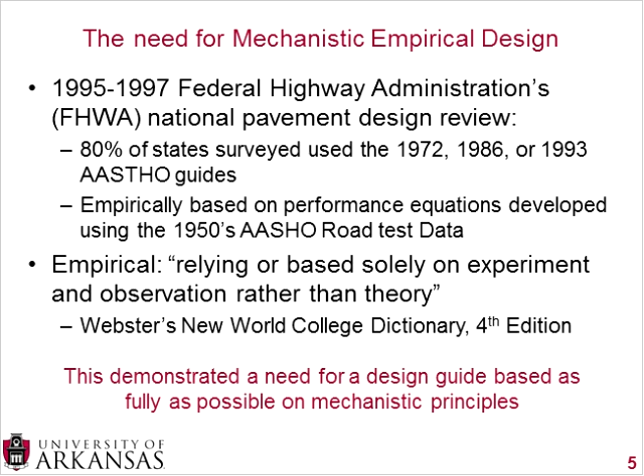We'll go into that a little more as we go on, but in general, as we develop our design strategies, we're definitely wanting to move toward the mechanistic side of designing.

So what were some of the deficiencies of the AASHTO guides, whether from 72, 86, or 93? Well, first of all, there were some climate effect issues. The test track was located in central Illinois, so there was one geographic location. Now, I did go to the University of Illinois, so I may be biased toward that part of the country. However, I do fully realize that there are many more climate types around our country than just central Illinois.

Not to mention it's awfully flat, but that wasn't taken into account. In addition to the one geographic location, they only had one type of subgrade. As you go around different parts of the country, there are obviously many different types of subgrades out there. For the project, they only used one HMA and one PCC mix. So all of these numbers in the 72, 86, and 93 design guides were based off of only a single HMA mix and a single PCC mix placed on a single subgrade in only one geographic location. So you can kind of see how this is a pretty narrow scope.

And while a lot of good data was collected, and it definitely helped advance our pavement knowledge, it really doesn't encompass what we're encountering today, where we have many, many different types of both HMA and PCC mix and mix designs.

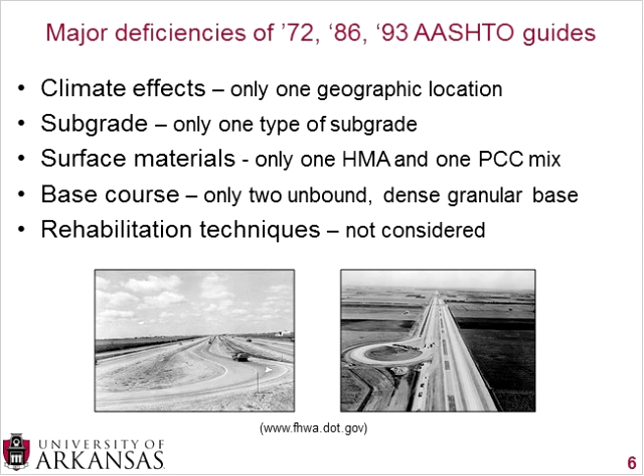For example, right now we have the new super single tires. I don't know if you've noticed while driving down the interstate, now some of the semis have single tires on each side of the axle on the back of the trailers instead of having the more typical double tires. So that's an improvement in technology in a lot of ways, but that also means you're looking at new tire pressures within those super singles, new axle configurations, and those type of things.

For the construction and the drainage, they used a relatively old technique. There's been a lot of advancements in construction technologies, and also they had no subdrainage. So right now, we fully realize that having water trapped within our pavement structure is not a good thing. So we spend a lot of time designing and planning for drainage.

The design life for the AASHTO road test in Illinois was only for 2 years. Right now we can design roads for 20, 30, up to 50 years if we so choose. So that's pretty limiting. And then finally, the performance is only related to the layer thickness, so they didn't look at any other material properties, any other quantifiable factors when thinking about performance.

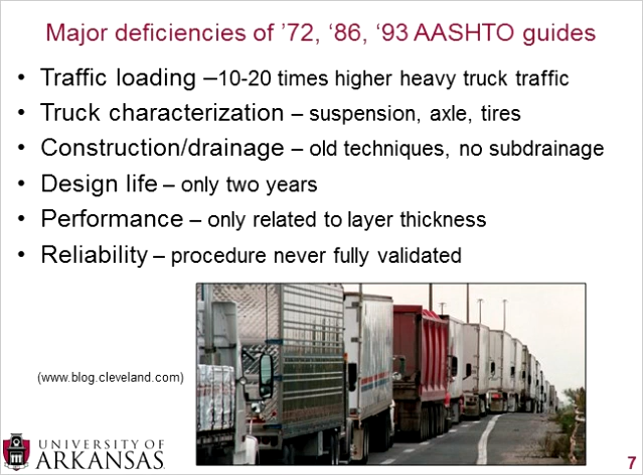And finally, they never validated the procedure. So they did a lot of work, a lot of good work, got a lot of information, but it was actually never validated with a second party. As all researchers know, you try and do things perfectly, but either mistakes or oversights do occur. So by not validating this information, that really does shortchange a lot of the potential for new changes.

So those are some of the disadvantages of the old design method.

So what are some of the advantages of the mechanistic empirical design method? At the end of the day, we want to reduce early failures in pavements and increase pavement life. Mechanistic empirical design incorporates a significant amount of material properties into the design strategy, and by using these properties you can better predict how the pavement will fail. Also, a lot of design features can be directly considered in mechanistic empirical design.

For example, you can compare the bending strain at the bottom of an HMA layer to fatigue cracking predicted in the laboratory. Fatigue cracking, if done correctly, is a fundamental property, and the fatigue life of pavements is a fundamental property. By using those fundamental properties, we can associate them with the strains at the bottom of pavement layers in hopes of getting a better design and a longer pavement life.

Some advantages of using this design procedure from a more practical standpoint are that, in theory, you have lower facility construction and rehabilitation costs. By better planning for what's going to happen in the future, you can theoretically decrease future costs. You can also reduce delay time for highway users by being more efficient with your construction.

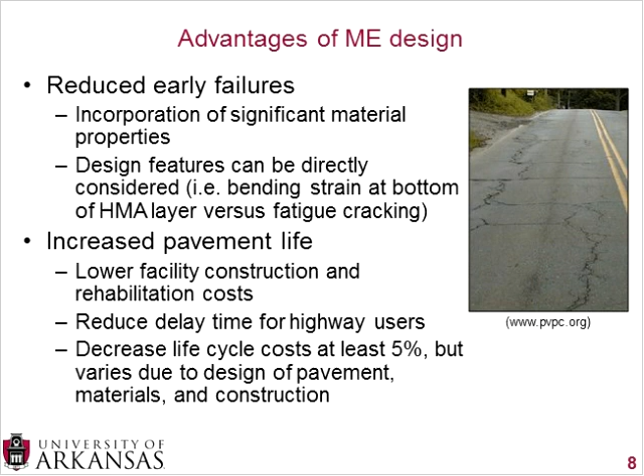More advantages of mechanistic empirical design - this is a good time to mention that when the 1986 and 1993 AASHTO design guides were coming out, they were cognizant that there were drawbacks in the design procedures. It wasn't that the knowledge wasn't there, but as people are well aware, changes in specifications and design procedures take quite a bit of time. It takes research, understanding how we're going to best go about it, so these major changes can take quite a bit of time to implement.

But some more advantages of mechanistic empirical design is that you can evaluate new loading conditions. Going back to axle configurations, the weights that go on there, the repetitions - you have the possibility of doing that, in addition to loading conditions due to climate. As temperature cools, especially in the northern states, stresses build up in the pavements and thermal cracking occurs. Those loading conditions are accounted for.

You can also have a better utilization of available materials. By using materials in your area and running performance tests, you're able to actually understand better how the pavements are behaving in your part of the country because you're able to use those materials.

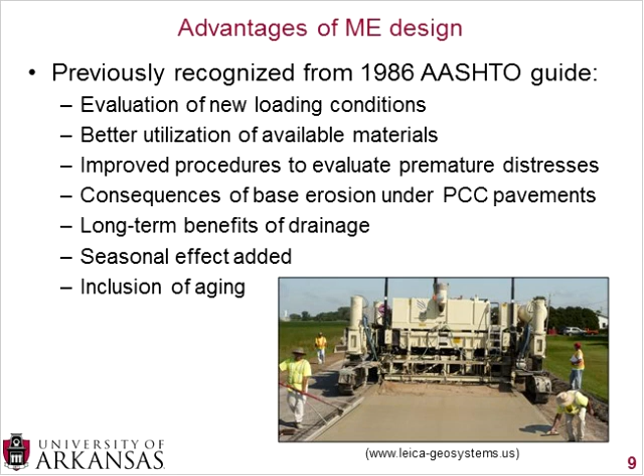Now, however, unfortunately, with all these advantages, there are some disadvantages.

One is cost. The most recently available ME design software within pavements, the DARWIN-ME, costs approximately $5,000 for an individual workstation, which is a significant investment for small companies and DOTs. Even for larger companies, you can buy a site license from $20,000 to $40,000 depending on your needs. So if you're a larger company, you get a slightly cheaper price, but still $20,000 to $40,000 is a significant investment for design software.

There is added complexity with the evaluation of new loading conditions that ask for more traffic data. What you put in will determine what you get out, so if you want a more comprehensive result, you have to put more comprehensive information into the design. The loading conditions are one thing that is added, in addition to significant amounts of climate data. They actually use the LTPP climate sites around the country in your iterations.

However, when that happens, you can have up to 15 minutes per run. When doing these iterations, we get spoiled by computers being able to do things so quickly. When we did pavement designs by hand, they took longer than 15 minutes, but now we would like to be able to do multiple designs in a morning and really get some ideas out to see what's best for our conditions. But as you add more inputs, it does take longer to run.

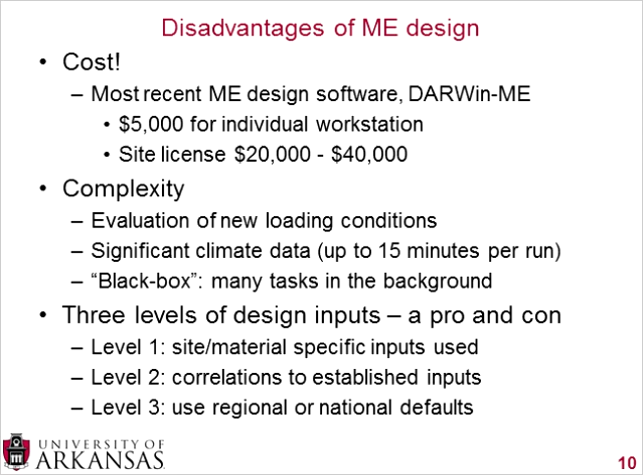So those are the advantages and disadvantages of mechanistic empirical design. There are a lot on both, but I think that as we move forward, this is what we'll be using, and hopefully we'll be able to minimize some of these disadvantages.

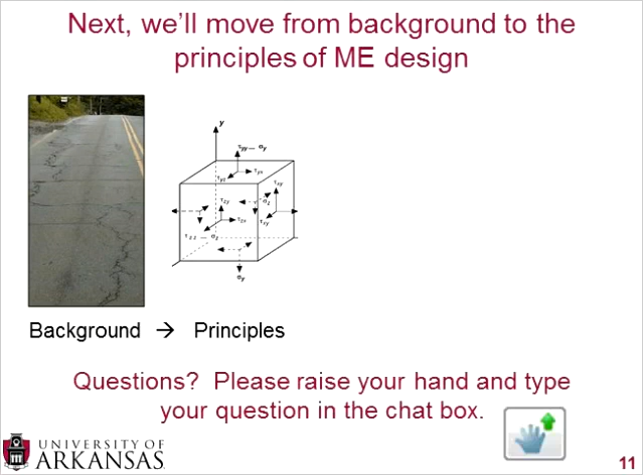So I'm going to scoot ahead again back to here. We've gone over a little bit of the background, and now we're going to talk about some principles of MEPDG, or mechanistic-empirical design.

So what is the point of mechanistic-empirical design? Well, what we want to do is apply engineering mechanics and rationality to our pavement design process. And what we need to do in order to achieve that is bridge the measures and the causes of distresses.

So what are some measures that we have in pavements? Well, we have stresses and strains in the pavements, and then we also have deflections. These are 3 examples of engineering measures that we can actually go out and measure either in the field or in the laboratory.

And then we're trying to combine those engineering measures with the physical causes. At the end of the day, why do pavements fail? It's because of the loads that are applied on those pavements, whether caused by traffic or by the environment. And all other physical causes can include the material properties of the pavement structure itself.

So what type of materials are you putting in there? Are you using a hard or a soft aggregate? Are you using asphalt concrete or Portland cement concrete? All of these things can definitely lead to different engineering measures. So we're trying to link the engineering measures and the physical causes.

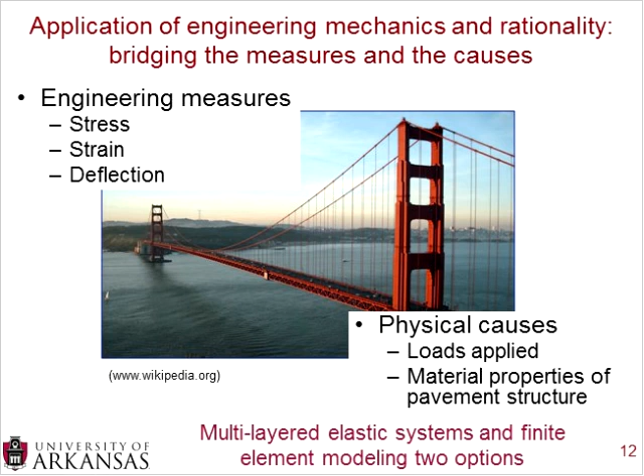There's really 2 options available for mechanistic empirical design. You can either use a multi-layered elastic system or finite element modeling. DARWIN-ME uses kind of a combination of both of those. But we'll start with talking about multi-layered elastic systems.

Now when you're using multi-layered elastic systems, you do assume that material properties in each layer are homogeneous. Obviously, Portland cement concrete and asphalt concrete are heterogeneous materials, but you're assuming in the multi-layered elastic system that they are homogeneous. You're also assuming that each layer has a finite thickness, and this makes sense for the upper layers.

Obviously you have 12, 15, 18 inches of Portland cement concrete, sometimes more, sometimes less. But when you start going down, especially into the subgrade, the natural base, you also assume that that has a finite thickness, when in actuality, the subgrade is essentially infinitely deep when you're thinking about the material property reactions of it. You're also assuming that each layer is isotropic.

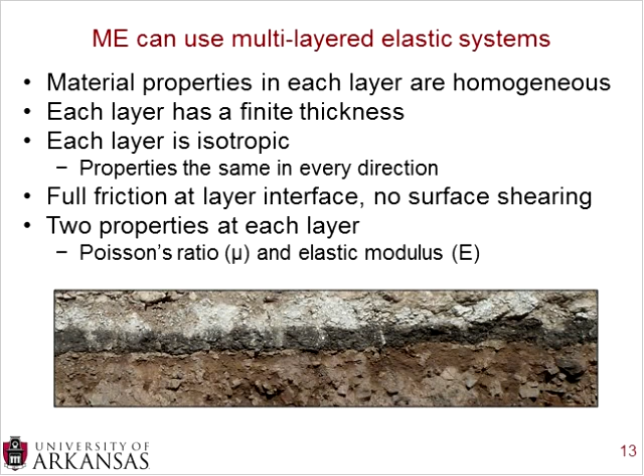And then finally, you have only two properties on each pavement layer. You have the Poisson's ratio and the elastic modulus, which is mu and capital E. So these are all the inputs that you put into the multi-layered elastic systems.

What can you get from these multi-layer elastic systems? Well, you have the three normal stresses, which is simply the load over the area. You have normal stresses in the Z, R, and T direction, or the Z, X, and Y direction, depending on whether you're using radial and tangential coordinates or the standard X, Y, Z coordinate system. These different forces act perpendicular to the element faces.

You have 6 different shearing directions in combination with each of the directions, and those act parallel to the element faces. From the previous slide, we knew we had the elastic modulus, or big E. We knew we had the Poisson's ratio. And now we have the stresses.

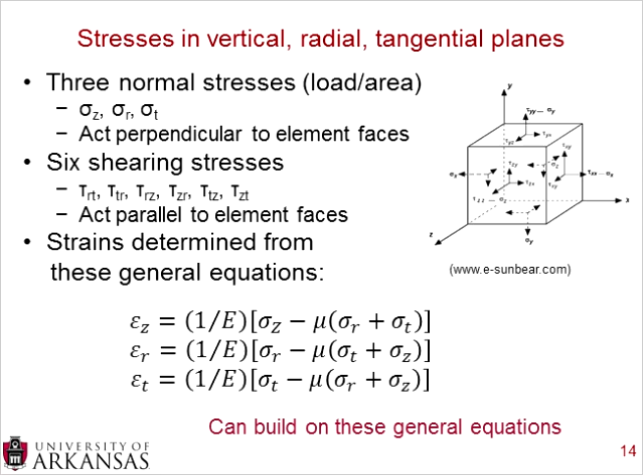Those general equations are used for 3 properties. First, we want to find the relationships between the stresses and the strain, which are those 3 equations, and determine if they're linear or nonlinear. Asphalt concrete, as it gets warmer, becomes nonlinear. As it becomes colder, going below freezing, it becomes more linear.

If the material is non-viscous, the dashpot acts on a smaller level; the dashpot indicates the viscosity, while the spring indicates the elasticity. That goes into the 3rd bullet point, the degree to which a material can rebound or recover strain after stress removal. A tire going over pavement puts a stress on it. As that tire moves away, you may expect some rebound — that's whether it's plastic or elastic. As the tire goes over the pavement, you may expect some deformation — that's viscous or non-viscous.

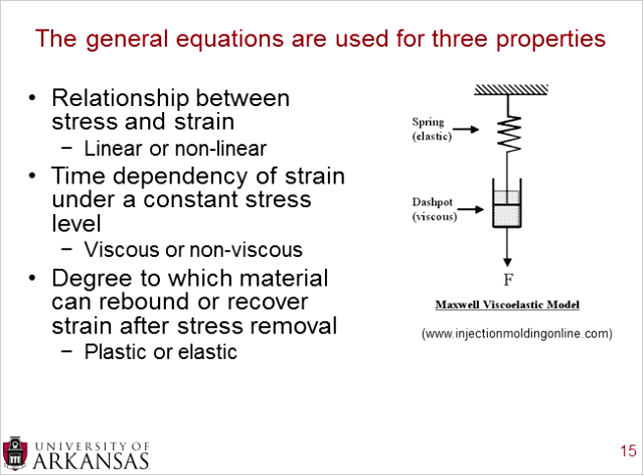Along with the multi-layered elastic systems, mechanistic-empirical guides can also use finite element procedures. Finite element procedures simply divide your pavement and pavement layers into small, discrete portions. If you recall the box a couple slides ago with the shear and normal stresses on it, that's essentially what finite element simulation does — it makes a whole bunch of small boxes, called elements, and at each corner of those boxes you have what are called nodes.

What you can do is assign a behavior to each element, done through something called shape functions and equations. You can essentially treat each one of those boxes or elements as a small chunk of pavement, so it has certain properties to it.

As a load is applied to all these small boxes or elements, depending on what properties they have, they will expand or contract, compress, and move against each other. All of these things will be happening. That's the fundamental relationship of finite element modeling — taking these complicated structures and dividing them into very small portions. When you do that, you can break it down and measure how the pavement, or the simulation, deflects.

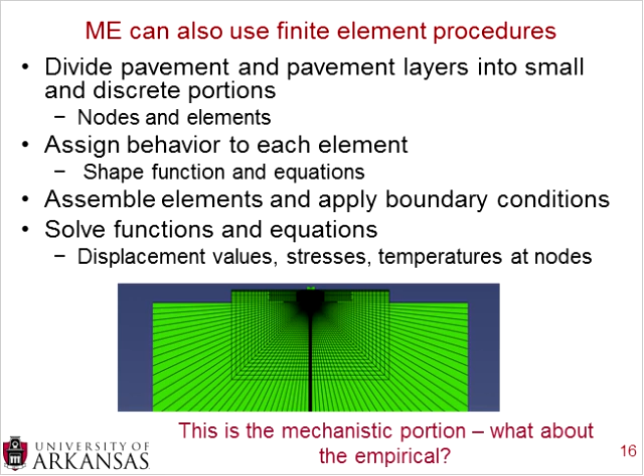Multi-layered elastic systems is one way of mechanistically predicting pavement performance. Finite element simulations are a second way, but we're talking about mechanistic-empirical. So what is the empirical portion of this design?

The empirical portion has a lot to do with relating the materials to the inputs, for example the traffic and environment, to the material properties, and also relating the field performance data to accumulated damage.

When you're putting inputs in, you can also put actual damage that has occurred on other, similar roads, but then that damage needs to predict what will happen on new or future roads, and they use transfer functions in order to do that.

What they can also do is look at damages at critical locations, so you don't need to necessarily look at a full 10-mile project. You may know there's one spot with a weak subgrade, or one spot going over an overlay of highly damaged existing roadway. So you can identify areas where you think distresses will occur and focus in on those areas. But that is another step of empiricism that kind of takes away from the mechanistic design.

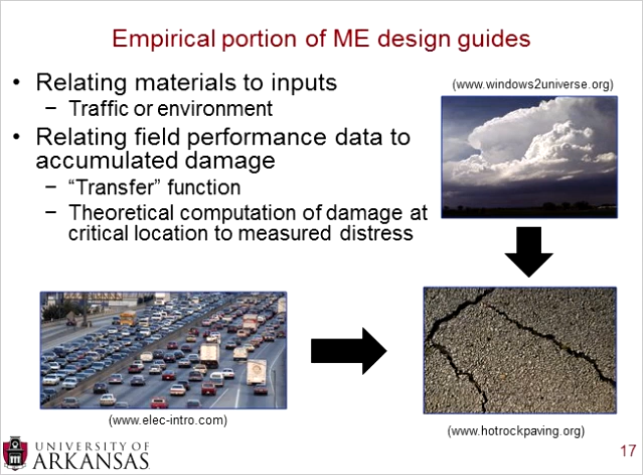So we've gone over the background and some principles, but now we're going to go into some examples of Portland cement concrete and how it's used with DARWin-ME, the Mechanistic-Empirical software that will probably be most commonly used for pavement design.

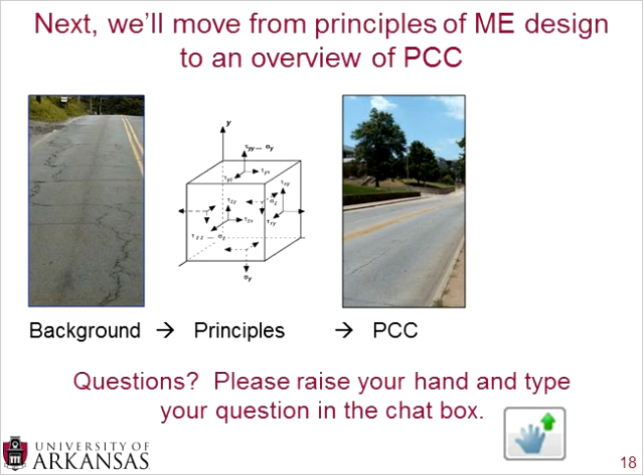When we're thinking about Portland cement concrete and DARWIN-ME, the first thing I'd like to do is go over the overview of the design process. With DARWIN-ME, you have two options for Portland cement concrete: you can either use jointed plain Portland cement concrete, or continuously reinforced Portland cement concrete.

When you're thinking about what sort of inputs you need and how to use the DARWIN-ME software, this is the design process you would use. The first thing you'd like to do is a trial design for your specific site conditions, identifying the traffic, the climate, and the foundation for the site you're designing the pavement on. Once you've established that, you want to define your material properties.

On the next slide, we'll talk about what some of those material properties are for Portland cement concrete. You'll also want to do your design and construction features. And if you recall, there are three levels: level 1, level 2, and level 3, and as the level increases, you decrease the amount of detail you're putting in about your specific site and area.

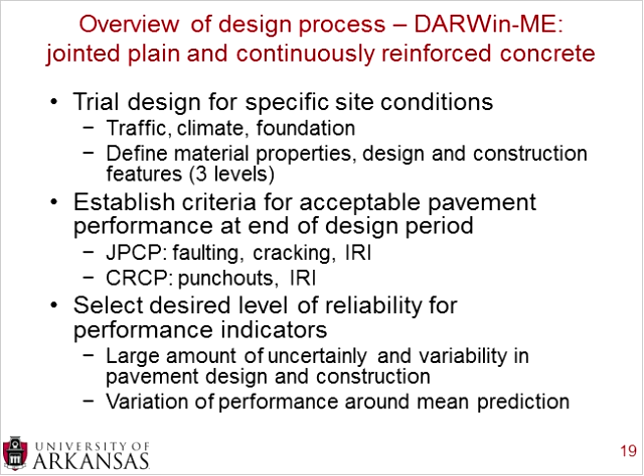And what you come up with is a variation of performance around a mean prediction. So your acceptable pavement performance is that mean prediction, and then you do anticipate some sort of variation around that mean prediction, but that's something you really can't control. We'll see a slide example of that too a little later on.

Once you've done those 4 steps, you then utilize the design guide to accomplish the following. This is where what I referred to as the black box came in. So we've told the design guide what our traffic, climate, and foundation is, what our material properties are. We've told it what kind of acceptable performance there is and the level of reliability for that performance. We have all of that as inputs, and now the design guide takes over.

And first, it computes the structural response. So you have your stresses and deflections computed, and for the jointed plain and continuously reinforced concrete, you use finite element models, and you have axle types and loads. You can see it kind of breaking down here. We're giving it all of these inputs, and then we're getting these structural responses as outputs.

And each month, the calculated accumulative damage is measured. This is a nice feature because that way you can see how things change over seasons. Maybe during the winter there is more damage. Maybe during the spring or the fall, when you have these temperature cycles, there's more damage. But you can actually see each month how that progresses along, and you can predict the key distresses using these models month by month.

And then finally, the last thing that happens is there is a predicted IRI, or predicted smoothness. I apologize, IRI stands for International Roughness Index. And you have a predicted IRI based as a function of your initial IRI. So even a brand new pavement does have a slight amount of roughness, but you predict future roughness based on that initial roughness.

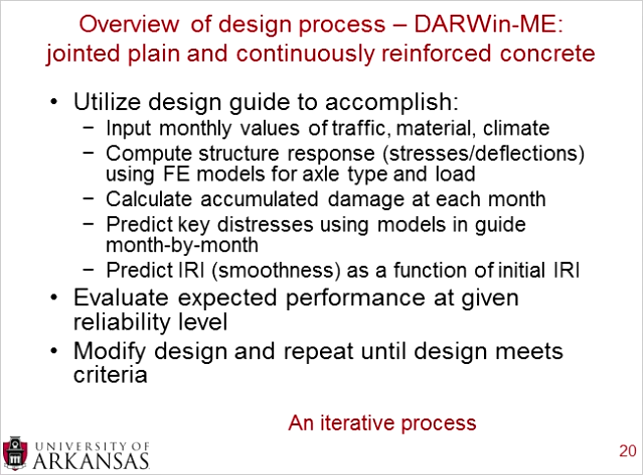So you go through the process, and approximately 15 minutes later you get a number. If things aren't looking as you would like them to, then you can do an iterative process. You can change layer thicknesses, you can maybe use slightly different materials, all these different things in order to get to where you need to be.

So here's an example of a required slab thickness for jointed plain concrete pavement. On the y-axis we have the design thickness, from 9 to 10 inches. And then we have the reliability: how reliable do we want our study to be? Do we want a 95% reliability, which is on the far right, or a 50% reliability, which is on the far left?

You can see in the small box within the graph, it gives the amount of trucks, the amount of ESALs, the climate type, joint spacing, what type of material is below the JPCP, and some material properties. The MR is the modulus of rupture, and the EPCC is the static modulus of elasticity for the Portland cement concrete. So there are all these inputs you put in here.

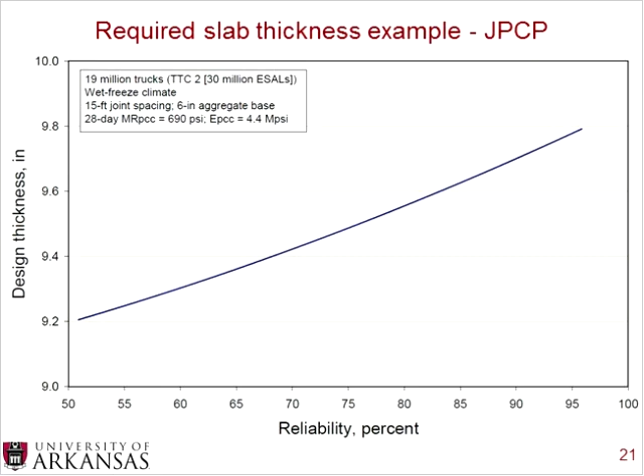And then you can say, we're looking for a reliability level of 95%, which would give you a thickness of approximately 9.8 inches. Or if you want only 50% reliability, it would be a thickness of 9.2 inches. Sometimes the reliability range gives you a greater thickness design, depending on the materials and the climate. This is a relatively narrow band, but in general, as you increase your reliability, you increase your thickness.

As I've been mentioning, there are 3 levels of design input. Level 1 is the most detailed design input you can have. You have site and material specific inputs for the project, and this has to be obtained by either direct testing in the laboratory and field, or measurements taken in the laboratory or field.

For example, you could collect laboratory values of MR, which is modulus of rupture, or the flexural strength, F prime sub C, which is the compressive strength, F sub T, which is the split tensile strength, and E sub T, which is the static modulus of elasticity at 7, 14, 28, and 90 days. You also have the measured traffic volumes and the weight of vehicles. So you have a lot of details at level 1.

You're putting in a little more effort up front to get more details and more analysis in, which will take a little more investment up front, but in theory you're getting a better design out the back.

However, they have provided 2 more levels. For example, level 2 is where you use correlations to establish or determine inputs. So you only need the lab values of the compressive strength at 7, 14, 28, and 90 days. The program DARWIN-ME will automatically give you correlated values for the MR, F sub T, and E sub T. So you've decreased your testing significantly, by probably over 75%, by using just the compressive strength.

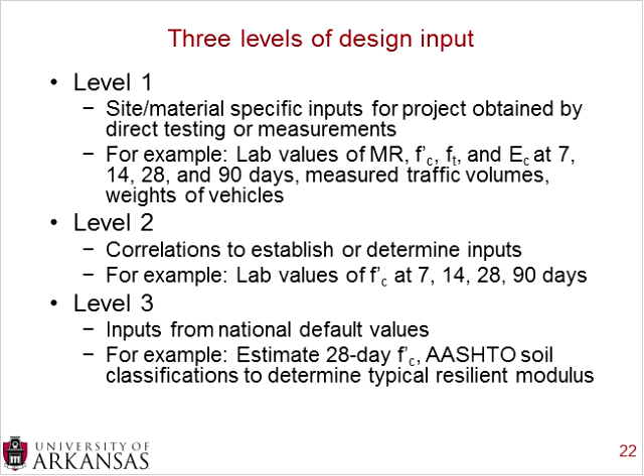So that is an example of Portland cement concrete, and the next example we'll do is for hot mix asphalt or asphalt concrete, but I'd be happy to entertain any questions now.

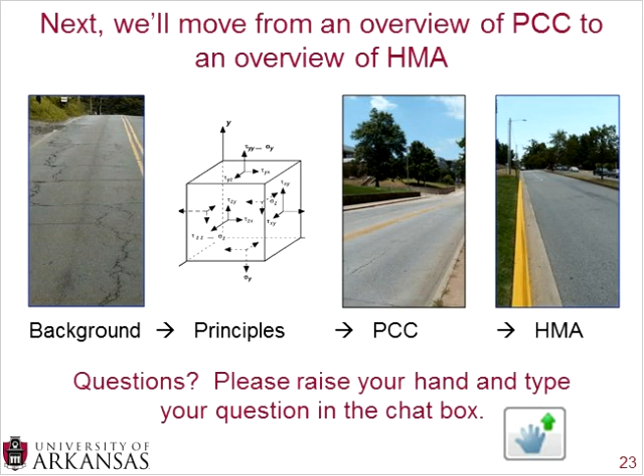So as we move on for asphalt concrete, again this will be very similar to the Portland cement concrete, but the details that go into each step are a little different. For hot mix asphalt, the overall design process, just like Portland cement concrete, you start out with a trial design for specific site conditions. However, the conditions you're interested in for this design are much different for hot mix asphalt versus Portland cement concrete. So you can see for HMA, you're looking for subgrade support and your HMA/base material properties.

So those are slightly different than the Portland cement concrete, but similar things include traffic loads, the climate, the type of pavement you're doing, your design strategy, and also construction features. So some similarities, some differences to Portland cement concrete.

The next bullet, the acceptable pavement performance for the end of the design period, you're looking at much different types of pavement distresses for hot mix asphalt. We covered this a little bit in a previous presentation, the asphalt concrete maintenance principles. But for HMA, you're looking at rutting, fatigue cracking, thermal cracking, and again IRI. So these are the distresses that you are trying to predict in the HMA design strategy.

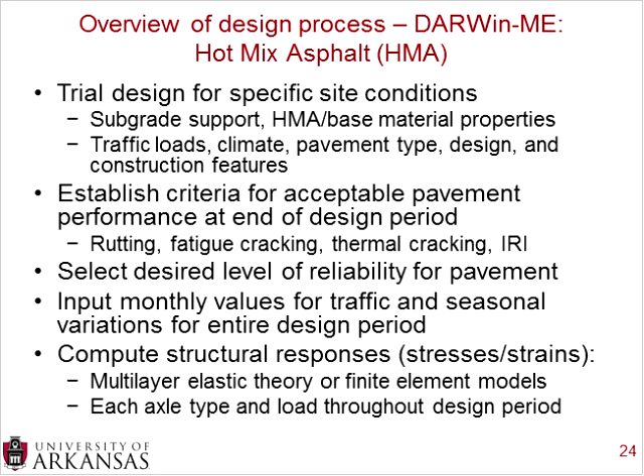But like Portland cement concrete, once you input all of these things into DARWIN-ME, you come out with the structural responses, the stresses and the strain. You can use either multi-layer elastic theory or finite element models. And you need to know each axle type and load throughout the design period. So there's a little more flexibility with HMA versus PCC in terms of the models you can use, but you're looking for the same thing. You're looking for the stresses and the strains, which is the key to mechanistic empirical design.

So once you know those stresses and strains, you calculate the accumulated distress and or the damage for the entire design period, and you can predict the key distresses by performance models provided in the guide. So the guide has done a lot of calibration internally, so it knows that based on certain inputs and certain outputs from those inputs, you can predict key distresses. You can also predict the smoothness as a function of the initial smoothness, like the Portland cement concrete, and the distresses that accumulate over time. And finally, you evaluate the expected performance at a given reliability level.

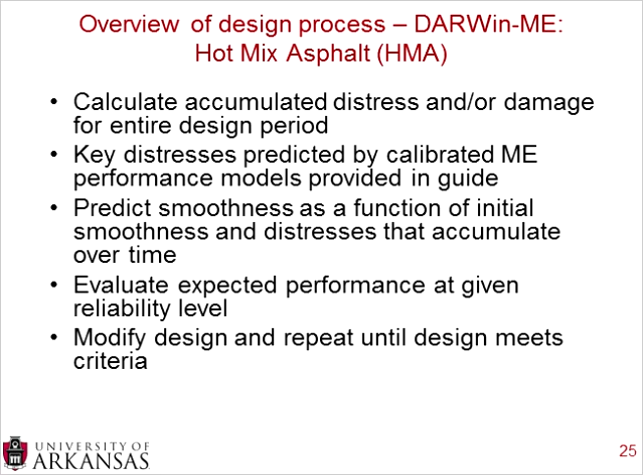So it's a real broad overview. Both Portland cement concrete and hot mix asphalt, you enter in the material properties and the site properties. You enter in the traffic environment. You put those into the DARWIN-ME program, and then the distresses and damage comes out of the program. And you say, is this an acceptable amount of distresses and damage? If it is an acceptable amount, then you have your design. If it's not an acceptable amount, then you need to modify your design and repeat until it meets criteria.

And we also have a probabilistic approach for HMA. So this is an example of the level of reliability. We're talking about the rutting, which is here on the y-axis. What kind of level of reliability do we want? In this graph here, we're looking at design life of 25 years. Our critical value is 0.4 inches of rutting. And then that line is the predicted rutting from DARWIN-ME according to the inputs that we put in there.

Now that line goes through 25 at one point, but you can construct a 95% reliability curve around that. So you're 95% sure that rutting will be between or underneath that curve, and that looks like a critical value. If it's a linear scale of approximately 0.2 to 0.4, you're 95% sure that it will be under 0.4. So if you're willing to accept as a designer the 95% reliability, then this seems like a good design.

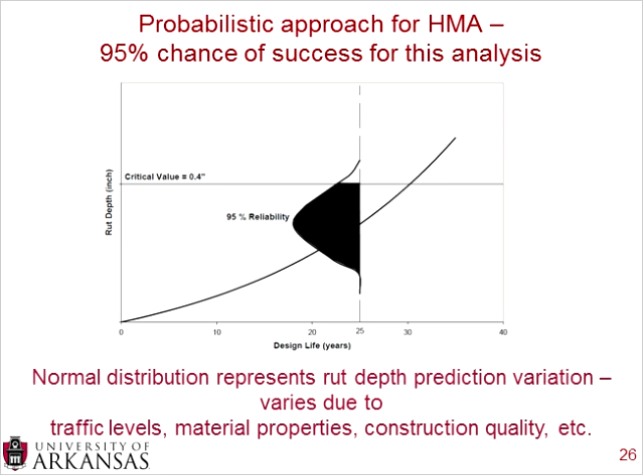And this normal distribution, how does it get created? What determines the amount that it spreads? Well, it varies due to your traffic levels, your material properties, your construction quality, and those other inputs that can be put in there.

Again, much like Portland cement concrete, there are three levels of design input, level 1, level 2, and level 3. At level 1, you have a lot of site and material specific inputs for the project, so you need to obtain those by direct testing or measurements. Some examples is dynamic modulus of the mixture, or E-star, for hot mix asphalt mixtures, the combination of aggregate and asphalt cement.

And you also need to use superpave binder data, for example G-star, which is the complex shear modulus, the sine delta, where delta is the phase angle, the S, which is the creep stiffness, and the M value, which is the rate of change of creep stiffness versus time. So we have all these different measurements that we can take of the materials in order to get the best design.

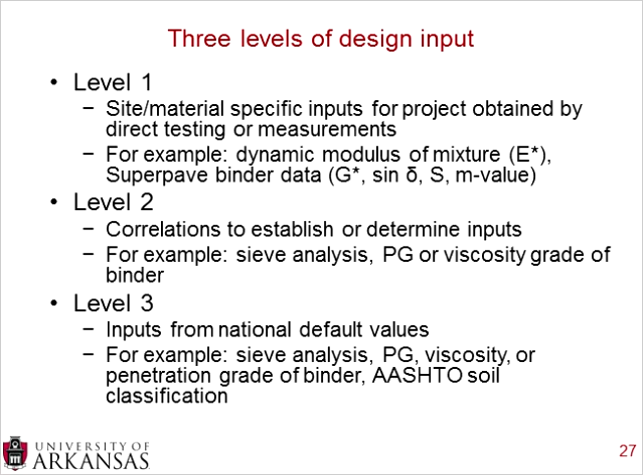If we don't have the right resources or the ability to do all of that advanced testing, we can move on to level 2, which is where you can, for example, use a sieve analysis or simply input the PG or viscosity grade of the binder. Obviously, the PG grade is dependent on G-star, sine delta, S, and M values. By inputting the PG grade, that will give an idea of the possible performance, and you can correlate that to the final performance. Finally, for level 3, you use a lot of inputs from national default values, again using less performance testing, more sieve analysis, PG viscosity or penetration grade, and also, like we used for Portland cement concrete, the AASHTO soil classification instead of actual resilient modulus values from the soil.